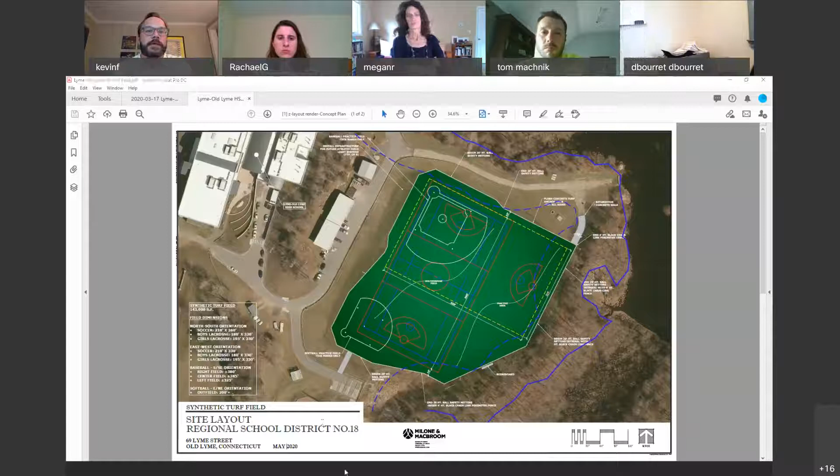Just switch over to the plan set. Okay, so this is the set that we submitted with the inland wetlands application. That just gets more into the details. Again, this is the existing site, basically a lot of topographic survey, so we understand the shape of the land out there and what earthwork needs to be done. We conducted test pits out there to understand what the soils are like. Typically, it's about a foot of topsoil with at least another foot of a good sandy, free draining layer underneath, which we're very happy about. Megan went into the field, flagged the wetland limits. We have the 100-foot upland review buffer in there, and we do have impacts within the upland review.

Typical layout plan showing some of those elements I described in the rendering. We are not increasing the footprint of this field. This field will actually be a little smaller than the limits of turf grass they have out there now, but we are just giving it a more formal structure and dimensions that we can fit regulation playing fields in.

You can see it leaves a few areas of lawn area now that would be outside the limits, and we're proposing doing some enhancement plantings there that would be native wetland specific type plantings, just to fill in these gaps and make it so there really doesn't have to be any maintenance beyond the limits of this turf field.

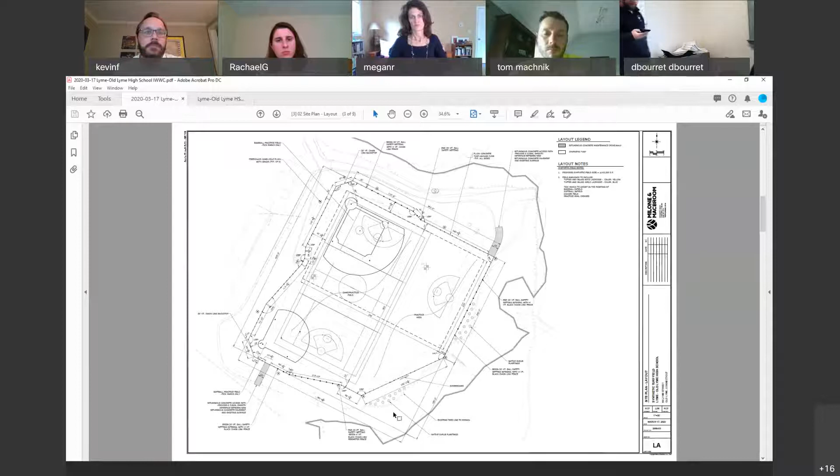What also I should point out here is this detention pond at the south end of the site. We're very fortunate to have that right there at the field. I believe that was constructed when the running track was constructed, but we will have underdrain systems in a turf field. As I mentioned, turf fields are meant to evacuate water from the surface very quickly. And so it will have an outlet tied into that detention pond.

However, based on the cross section of the turf field, the free draining stone we put in it, the non-restrictive geotextile fabric at the bottom, and then the existing sandy soils, we feel really good that a lot of the water that goes through the turf surface will just go into the ground and not put a burden on this detention pond. But it is fortunate to have it right there, so less infrastructure needs to be put in place.

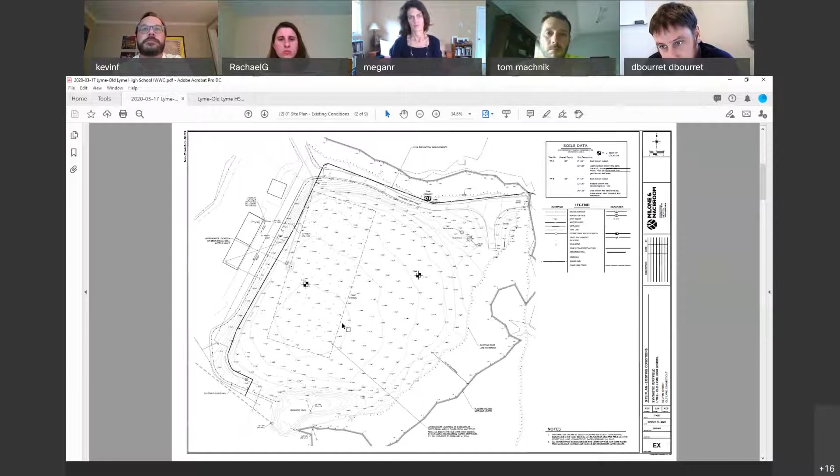We have a typical grading plan. Synthetic turf fields are a lot flatter than a natural grass field because, again, we're not relying on the surface for runoff. We're doing it all below the surface. So we'll be excavating the topsoil, the organic material, off-site. We'll be reshaping the existing sandy subsoils, and then we'll be building on top of that.

This is an underdrain plan. It's built like a golf course putting green. You have a series of flat drains that are on the subgrade. So when the water gets through, if it doesn't go through the subsoils, it will get collected into these drains, which then go to a perimeter drain system that's around the outside. And then we tie into that detention pond.

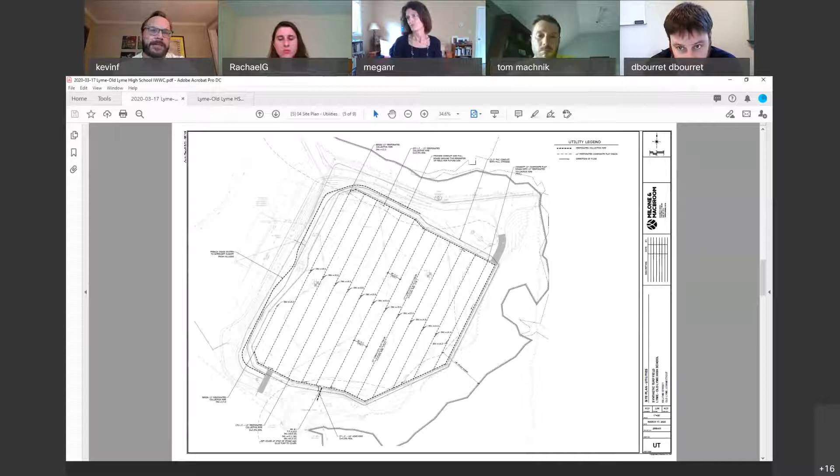Sediment erosion controls, all along the south and east side. We'll have hay bales, silt fence protecting the wetlands. The good thing about excavation, again, for a synthetic turf field, we're really creating a bowl. So once the mass earthwork has initiated, it's very difficult to get runoff off the site, but our engineers have designed a full plan for S&E controls.

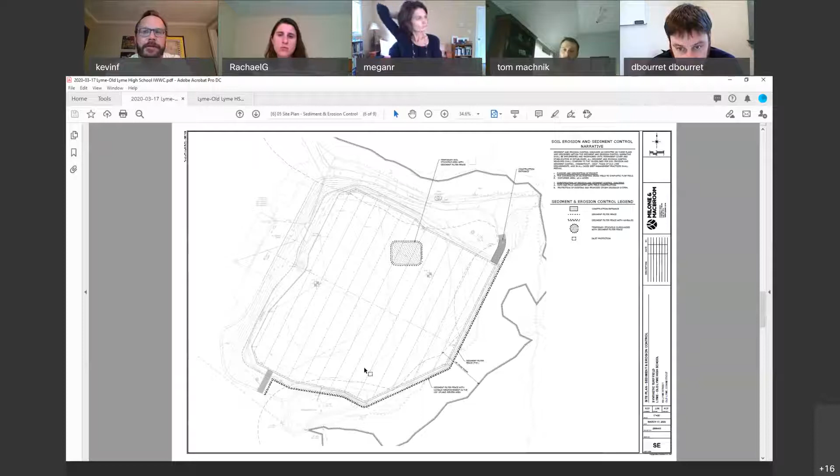So I went back to the grading plan. This is where we point out our regulated activities. The hatch might be a little light to see, but we have 2 areas where we encroach into the upland review area. There are no direct impacts to the wetlands, but we do have activities such as earth removal, grading, some fencing, some concrete work that's occurring in 2 sections of the upland review. So at the north end and then along the east and southeast side. And the total is about 29,000, say 30,000 square feet of upland review activity.

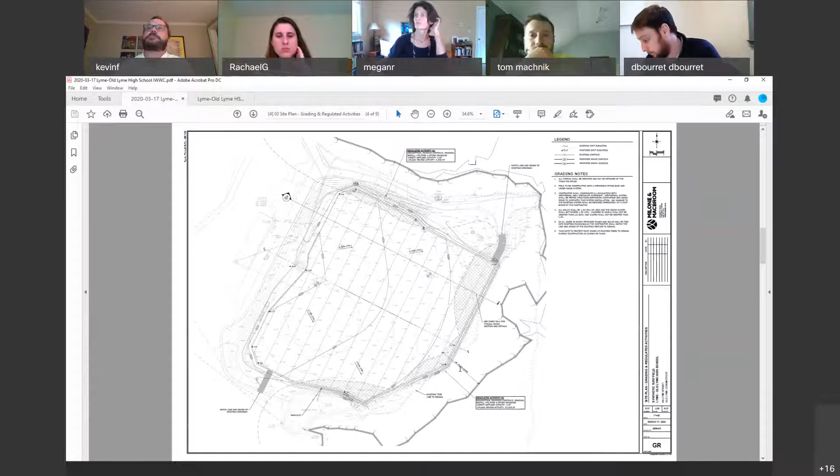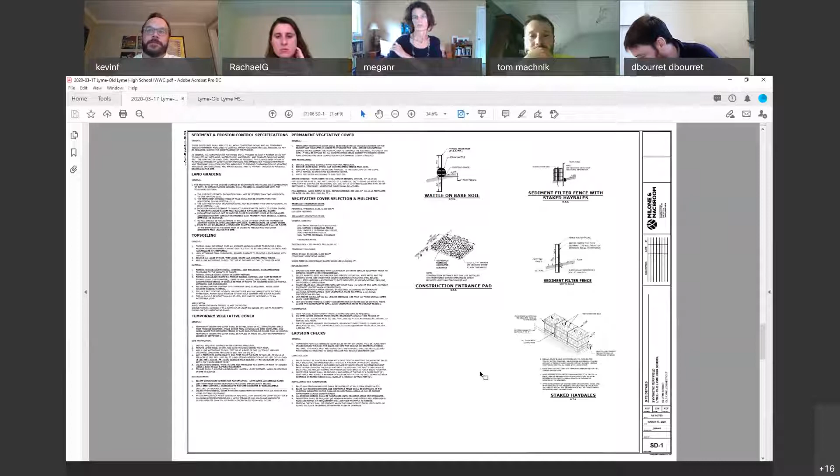And then the remainder of our drawing set is typical details, S&E control details, the hay bales, wattles, filter fence, construction entrance, tracking pad, and then just typical construction details showing the anchor curb, the perimeter drainage, the 1 storm manhole structure, our drainage trench, and a typical cross section of the field. This is more just fencing and line striping for the artificial turf.

Now with that, I just reviewed that. I'm sorry, just checking my notes. So again, we're not changing the footprint of the field. We're not making it any bigger. We're actually making it smaller. We don't propose any impacts to the existing vegetation line, to the tree line. We're utilizing the existing drainage basin.

Oh, and one big question that always comes up, there's no lights being proposed. So we're not lighting this field. We probably will put in infrastructure for future electrical needs. So just empty conduit, pull strings, hand holes around the outside, but no light poles, no light foundations, no electrical service of any kind at this time as part of this project.

Megan, would you like to say anything about the wetlands?

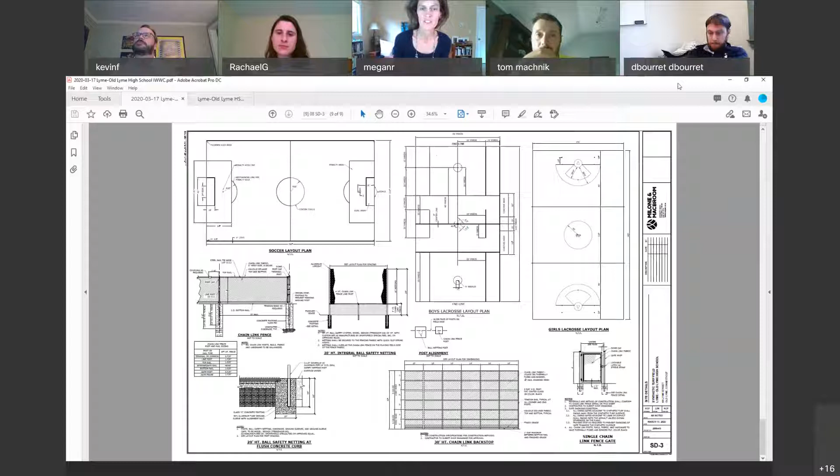Good evening. For the record, my name is Megan Raymond. I'm a professional wetland scientist and registered soil scientist. And as Kevin described, I delineated the wetlands on the wetland system adjacent to the proposed field improvements, field redevelopment. Essentially, as we described in our field walk last Tuesday, the wetland area is comprised of the Duck River riparian corridor, which exists to the east of the project area.

It's a mixed class wetland with a forested system in the southern portion of the wetland, and then the Duck River's impounded and created a pond in the northern portion of the delineated wetland area. As you saw in Kevin's plan, there are a few areas of upland review activity, one of which is along the northern boundary of the field improvements, and that area is a small ditch that conveys some stormwater as well as some groundwater discharge to the Duck River pond.

So in looking at the project within the context of the functions that those wetlands provide, we're not looking at any potential diminishment of the existing wetland functions within that delineated corridor. We're looking at a redevelopment project that's going to be confined to the existing footprint of the manicured lawn field. And we focus then on potential impacts that may be derived from increased stormwater runoff, which we're addressing through the robust infiltration system, and then secondary water quality treatment in your detention basin to the south.